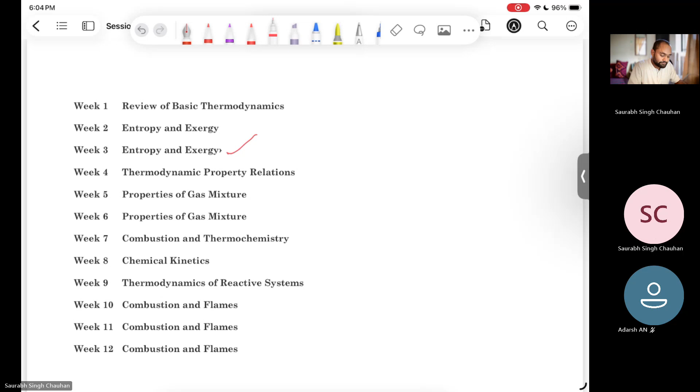If you have no doubt, then probably we can start with the questions. So there is a note saying that we have to use T naught and P naught to denote the dead state temperature and pressure respectively. When we'll be solving problems related to exergy, we know there is something called dead state. What is dead state? We will discuss that in the upcoming questions.

For the time being, let's start with question number 1. It is fill in the blank. It is saying that a quasi-equilibrium process, which is governed by PV to the power n is equal to some constant, is called what we call such type of processes. Very easy. We call them polytropic processes, right?

So some initial questions will be easy revision type of questions. So this type of process, we call it polytropic process. I don't think there can be any doubt in this question. If it is there, you can ask, or we can move to question number 2.

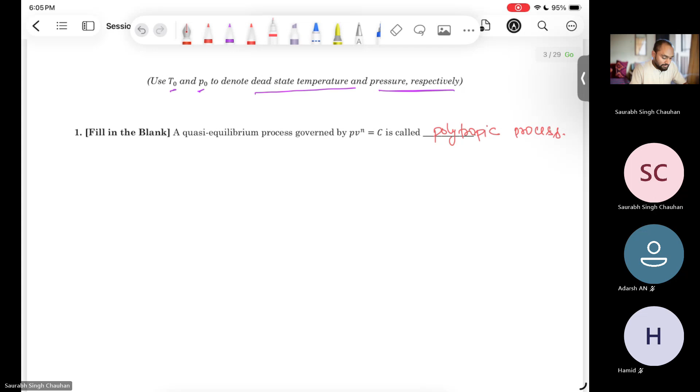Question number 2 is a multiple choice type of question. It is saying that for an ideal gas which is undergoing an isentropic process - ideal gas and isentropic, two keywords - which of the following relations correctly links temperature and pressure? So which of them is correct? T2 by T1 is equal to P2 by P1 whole power K minus 1 by K.

Okay, so part B, right? Yes. And if we are asked to derive that for an ideal gas and isentropic process, the relation is like that, then how should we proceed? We should start with TDS relation, because the TDS relation, for example, TDS is equal to du plus PdV.

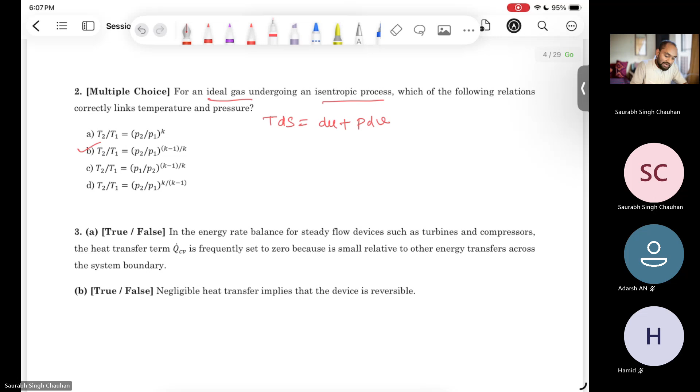We discussed in the previous session that this is valid for all processes, regardless of the process being reversible or irreversible, because all the variables involved are point functions, none of them are path functions. So it is valid for both reversible and irreversible process. Now it is saying that it is an ideal gas. So for ideal gas, we can write du is equal to Cv dt. This is for ideal gas.

And it is saying isentropic process, so that means ds is equal to 0 because it is isentropic process. So this TDS relation basically becomes 0 is equal to, because ds is equal to 0, Cv dt plus PdV. And from this relation, we can get this relation. We just need to do some algebraic manipulations.

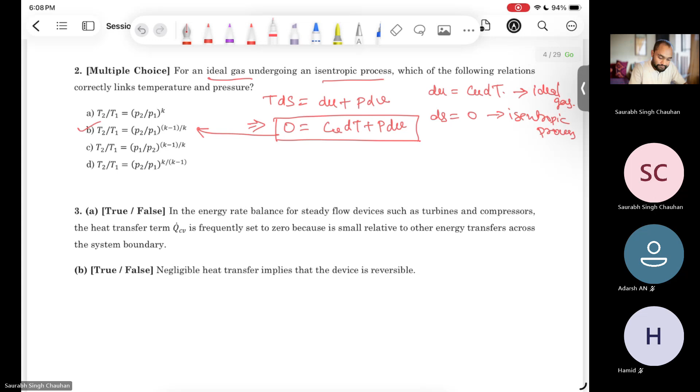Now, coming to the next question, question number 3. There are some statements and we have to tell whether they are true or false.

So first statement says that in the energy rate balance for steady flow devices such as turbine and compressors, the heat transfer term Q dot CV - this is basically time rate of heat transfer for the control volume - this is frequently set to 0 when we are working with turbines and compressors. So usually this term we neglect. It is saying that we do this because this term is small relative to other energy transfer across the system boundaries. We have to tell whether this is true or false.

Yeah, it is true, sir. It is true, right? Why? Because this term is relatively small. Turbine we usually assume that there are no heat losses, and same thing for compressor. And usually in many questions it is given that assume isentropic turbine, right? So when we say isentropic for these turbines or compressor, we basically mean that it is reversible and adiabatic.

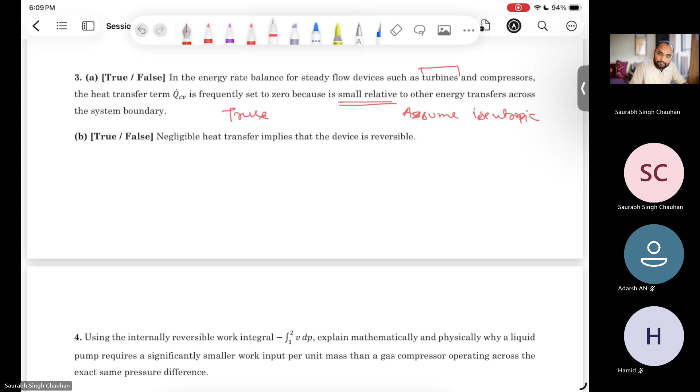But in the previous sessions, we will come to that point. So in many questions we encounter this term, right? Assume isentropic turbine or isentropic compressor. So we usually assume that this is reversible adiabatic.

Now there is another part. It is saying negligible heat transfer, so that means if dq, this thing is 0, which we are assuming in this type of devices, like it is given in the first part that we make this term 0. So if we are making this term 0, or let us say dq is 0, does that mean that the device is reversible?

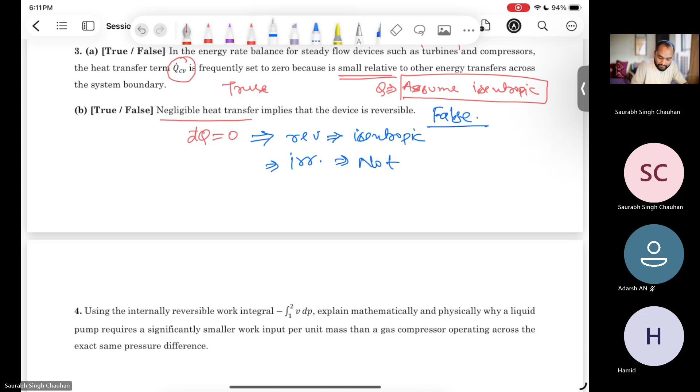Not exactly. It could be reversible or irreversible depending on whether it is isentropic or not. So the statement is false, right? Yes. So as you said, this implies reversible only if it is isentropic, or it will be irreversible if it is not isentropic. So this statement is actually false. Both things should be there, right? It should be isentropic and adiabatic, then only it will be reversible. If only dq equals 0, is this isentropic? It could be, information is not sufficient, could not be isentropic, depending on the case.

So in the ideal case, it should be adiabatic and isentropic. But in the actual case, in actual turbines and compressors, we know it is not isentropic. The exit entropy is higher than the entrance entropy, right? Yes, okay.

Just give me one second. I think there should be some spaces between the pages. Okay, we will insert some pages, no problem.

So question number 4, it is saying that using the internally reversible work integral. We know this formula, right? We have discussed this formula in the lecture. We have to explain mathematically and physically why a liquid pump requires significantly smaller work input per unit mass compared to a gas compressor when the pressure rise is the same, operating across the exact same pressure difference. So if the pressure rise is same for both compressor and pump, then the pump requires less work input. Why so?

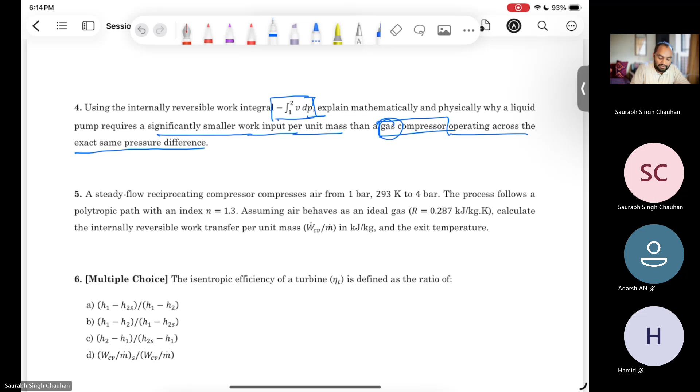Even if you don't invoke the compressibility factor, this V is high, right? Because the formula is simply V dP, and dP is the same. So the only variable left is this V term. So this V is high for gas. Okay, yeah, sure.

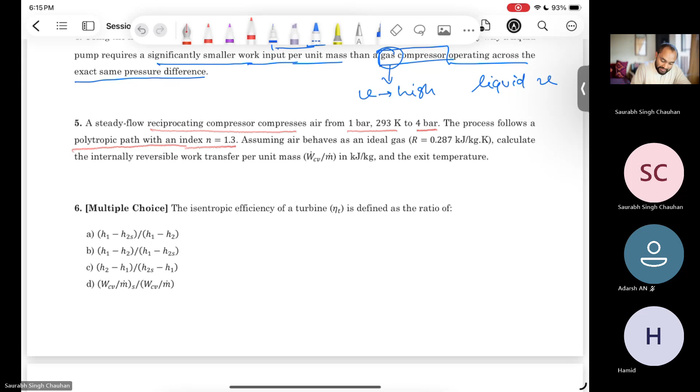Question number 5: it says a steady flow reciprocating compressor compresses air from 1 bar, 293 Kelvin, to 4 bar. The process follows a polytropic path with index n equal to 1.3. Assuming air behaves as an ideal gas, and the gas constant is given, it is asking us to calculate the internally reversible work transfer per unit mass in kilojoules per kg, and also the exit temperature.

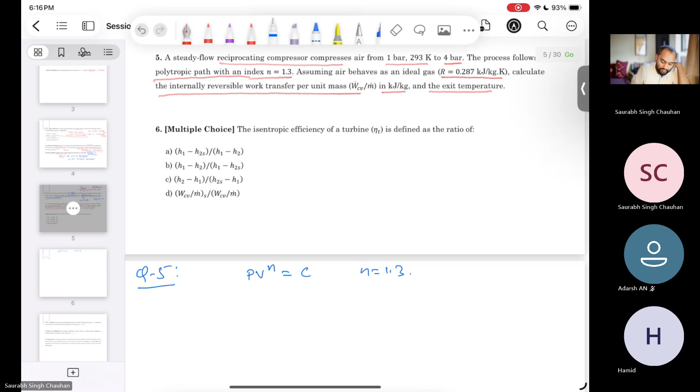It is a polytropic process, so for a polytropic process we can write PV to the power n equals some constant, where n equals 1.3. And for polytropic processes, we know the work input. Per unit mass, this is minus nR divided by n minus 1, times T2 minus T1. Correct? Yes sir, for polytropic process.

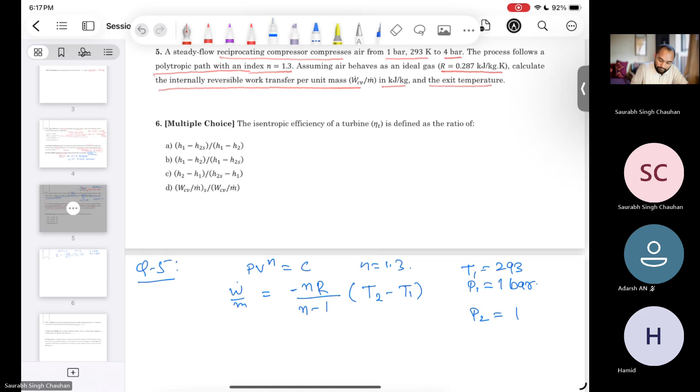So T1 is given, right? T1 is 293, and P1 is 1 bar. P2 is 4 bar, and we don't have T2, right? So T2 we can calculate from this polytropic relation. T2 by T1 equals P2 by P1 to this formula, right? So from here we can calculate T2.

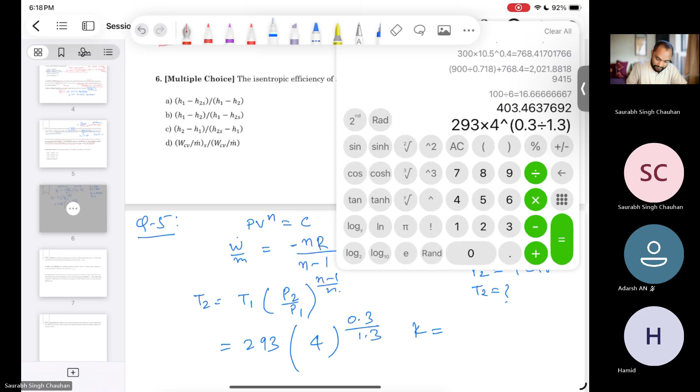So T2 will be T1 times P2 by P1 raised to power n minus 1 by n. T1 is 293, and 4 raised to power 0.3 by 1.3. So 293 times 4 raised to power 0.3 by 1.3 gives 403.46 Kelvin. So we have got T2.

Okay, and what else do we need? We got everything, right? T2 minus T1, we just need to substitute in the formula. So I think you can substitute and get it. So the work done we can calculate from this, and T2 is the exit temperature. 136.8, I don't have the exact values, I have to calculate, but anyways this is a simple question, you just need to substitute it.

Okay, so question number 6, it is saying the isentropic efficiency of a turbine is defined as the ratio of...

So we have some options, H1 minus H2. 1 is basically inlet and 2 is outlet, the actual one. And 2S - if you see any S, that means it is reversible, isentropic. Outlet for the reversible one.

Reversible outlet, yes, isentropic. Okay, so question number 6. There are some options, so which one of them should be correct? H1 minus H2 by H1 minus H2S - that's Option B, right? Yes.

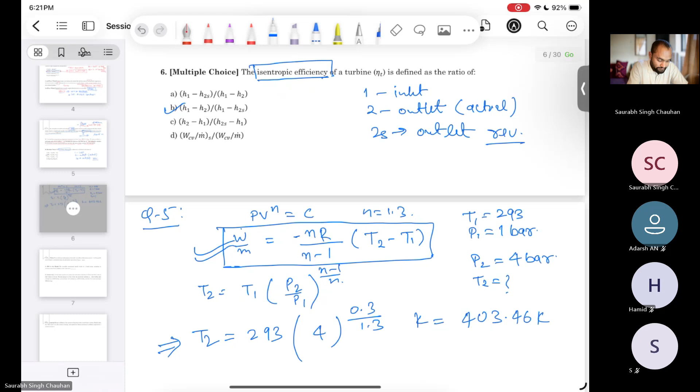Okay, so coming to the next question. And you can try to prove it yourself, okay - that isentropic efficiency and the second law efficiency are the same, okay?

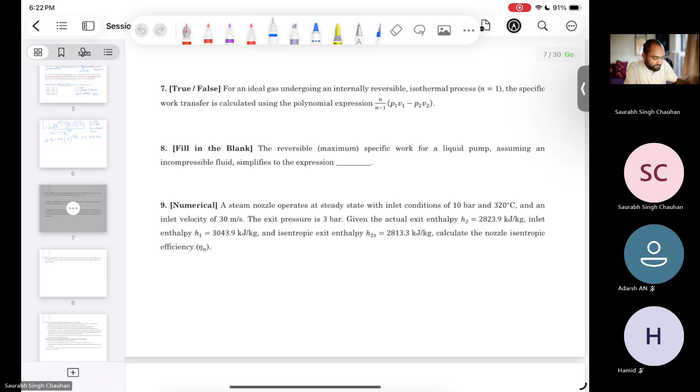Question number 7: it is saying that for an ideal gas which is undergoing an internally reversible isothermal process - so for isothermal process we know n is equal to 1 for the polytropic equation - the specific work is calculated using this polynomial expression. We have to tell whether it is true or false.

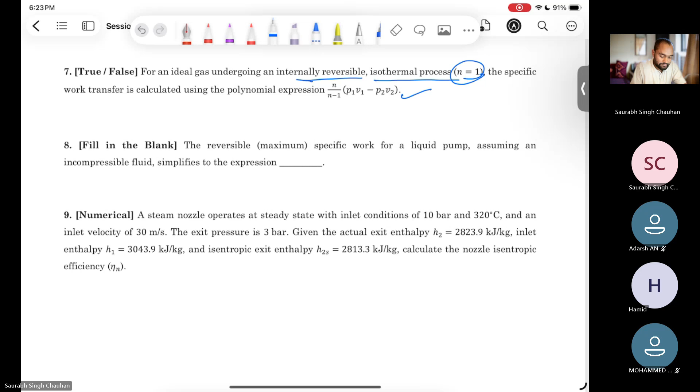Is it true or false? Obviously not true, right? n is equal to 1, and in the denominator you are getting n minus 1 equal to... it will be log of P2 by P1. Whatever the formula is, it's very obvious that if you have n minus 1 in the denominator, then this should not be valid for n equal to 1 type of processes, right? So this is false.

Now next question: the reversible maximum specific work for a liquid pump, assuming incompressible fluid, simplifies to the expression. So we had the expression for work done previously, right, when we were discussing compressors and pumps - what we had was the integral of V dP.

For incompressible fluid, this specific volume is essentially constant, okay? So this will be specific volume times integral of dP from 1 to 2, which will simply become V times P2 minus P1. So this is the expression.

Okay, now question number 9. It is saying that a steam nozzle operates at steady state with inlet condition of 10 bar and 320 degrees Celsius, and an inlet velocity of 30 meter per second. The exit pressure is 3 bar. Given the actual exit enthalpy H2, the inlet enthalpy, and the isentropic exit enthalpy are given, we have to calculate the nozzle isentropic efficiency.

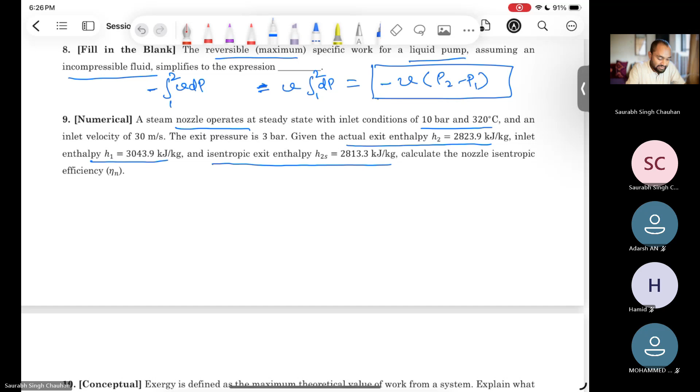I don't think that you need a property table or any paper or notes for the exam, because in most of the questions where we need these values, they will be provided. I'm not sure, but they should be providing it, because practically it is very difficult to check what steam table every student is carrying - they are not carrying any notes or something like that, right? So in most of the questions it is already provided, but I'm not sure for this particular case.

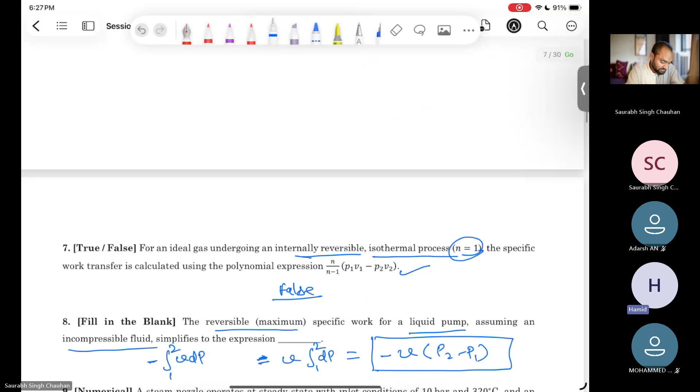Correct. Whenever we see this term efficiency, by efficiency we mean what actually we are getting divided by what actually we could have got. So what actually we are getting in case of nozzle, that will be increase in kinetic energy. The purpose of any nozzle is to increase the kinetic energy. So we will calculate what is the actual amount of increase in kinetic energy first, and we will divide that by what could have been the amount of kinetic energy increase if the process was isentropic, and we will just take the ratio.

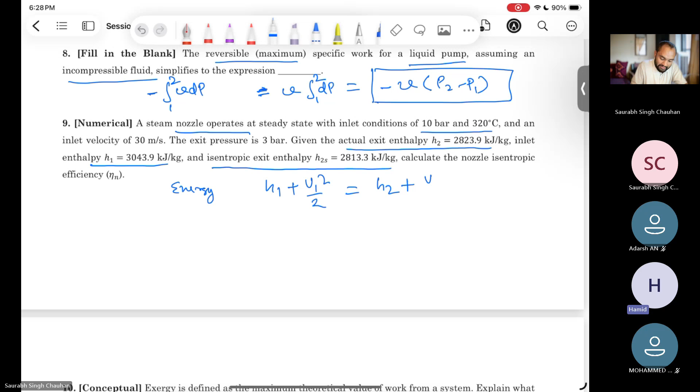So it is simply an energy balance. If we write the energy balance equation, this is enthalpy at inlet plus kinetic energy at inlet. This should be equal to enthalpy at outlet plus kinetic energy at the outlet. So you can calculate increase in kinetic energy, the actual one.

So what we have is inlet velocity, and we don't have the outlet velocity, right? So anyways, we can calculate the increase in this kinetic energy from this equation. Actual change in kinetic energy will be this, 220, whatever it is.

So this should be H1 minus H2, right? And isentropic increase would have been H1 minus H2S, okay? And we will just divide these two things. Is it correct? I think this would be the procedure, right?

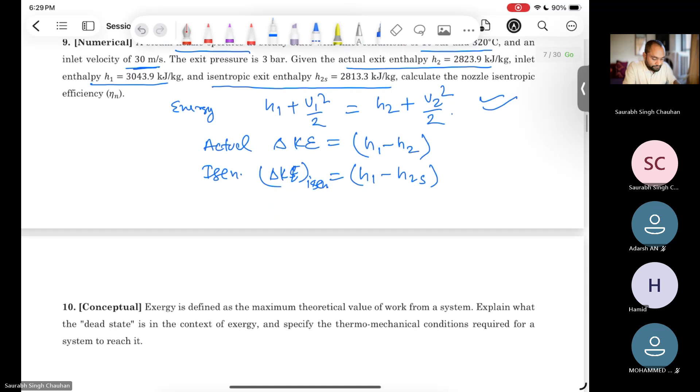So, but can we calculate inlet velocity also, right? Inlet velocity. No, inlet velocity we have, this inlet velocity, yeah. But I don't think we need the inlet velocity because we have the enthalpies.

We want to calculate the outlet kinetic energy. Yes, in this case we need to calculate outlet kinetic energy. Is it like difference between the inlet and outlet, or the outlet kinetic energy? No, outlet kinetic energy. So we need to calculate the outlet kinetic energy. So the efficiency for nozzle, it should be outlet kinetic energy, that is V2 square by 2 actual one divided by V2 square by 2 in the isentropic case.

So for this delta KE, we can just remove U1 square by 2 on both sides, numerator and denominator. So we have all the enthalpies at inlet, outlet, both for both cases, isentropic and non-isentropic, and we have inlet velocity, so you can calculate.

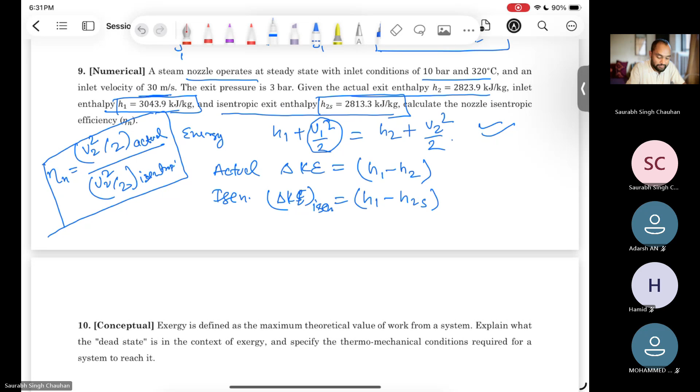We will not need this temperature and pressure values. If we didn't have these enthalpy values, and we had the steam tables, then we would have required these pressure and temperature values to check the enthalpy values from the steam table. So we are asking whether we need to carry them. If these enthalpy values were not given in the question, then we would have required the steam tables, but here it is given in the question. So questions should be of this type. This is my guess, but you should read the instructions before the exam.

Okay, so question number 10 says that exergy is defined as the maximum theoretical work from a system. And we have to explain what is dead state in the context of exergy, and specify the thermomechanical conditions required for a system to reach it.

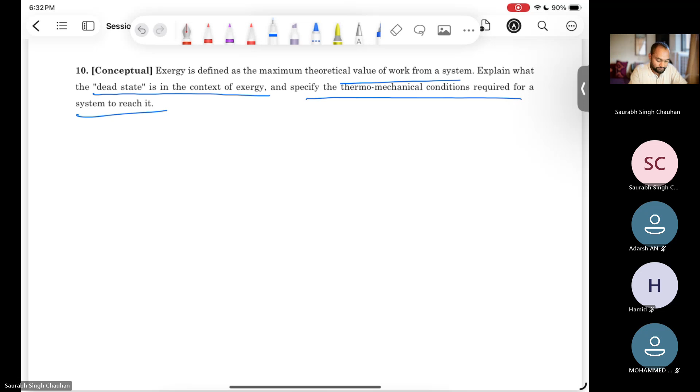So when we talk about exergy, we talk about dead state. So what is that dead state? For dead state, I have taken this content from the book by Cengel and Boles. So we will just read it, and I think everything should be clear. It is just theory.

So in exergy analysis, the initial state is specified. Right, the state of the system will be given - this is the temperature, this is the pressure, whatever variables we require to define a state of the system, those will be given, so that is not a variable. Why is it given? Because what will be asked is to calculate the exergy of this particular system. So whenever we say this particular system, then we should have a defined state.

Okay, so state will be already defined, so that is not a variable. Now if the state is changed, we are going from state 1 to another state, then we can have some work interactions. The work output will be maximum when the process between the two specified states is executed in a reversible manner, right? This we have already discussed. If we want to calculate the work output, then work output is maximum if the process is reversible.

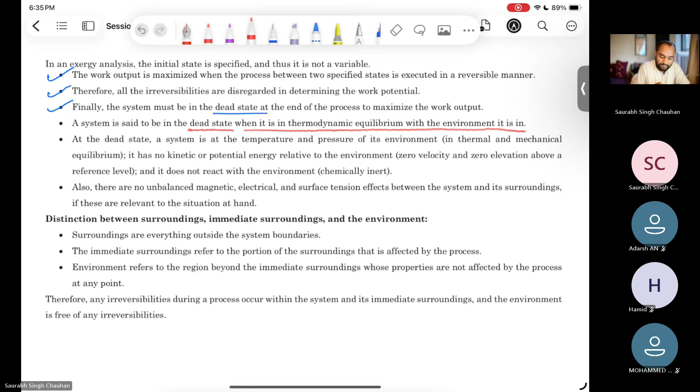Now the definition of dead state is coming. The system is said to be in dead state when it is in thermodynamic equilibrium with the environment it is put in. It should be in thermodynamic equilibrium with the environment in which it is kept. This is the meaning of dead state. At the dead state, a system is at the temperature and pressure of its environment. Temperature is same with the environment, that means it is in thermal equilibrium. Pressure is same, that means it is in mechanical equilibrium.

And it has no kinetic or potential energy relative to the environment. So in the reference frame of environment, the system should be stationary, zero velocity and zero elevation from the reference point. Zero elevation means there is no potential energy, and zero velocity means there is no kinetic energy. It does not react with the environment, so that means it is in chemical equilibrium as well. When all these equilibriums are there, we say it is in thermodynamic equilibrium with the environment. So this thermodynamic equilibrium itself is sufficient.

Also, there are no unbalanced magnetic forces, electrical forces, or surface tension effects between system and surrounding. So basically it is equilibrium from all the aspects, electromagnetism and thermodynamic aspects. So there is no potential difference, any type of potential difference, neither gravitational potential difference, nor electrodynamic potential.

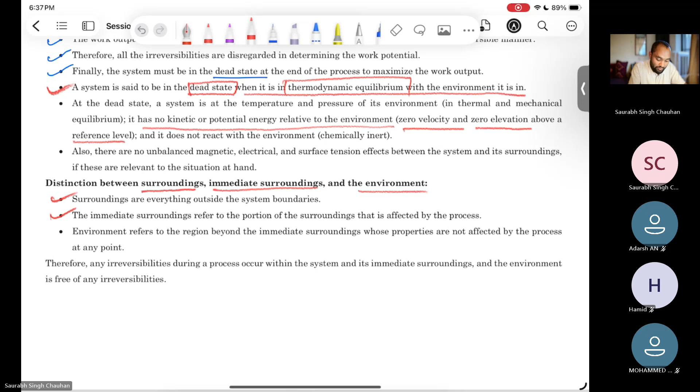The immediate surrounding refers to the portion of the surrounding which is affected by the process or the system. And the environment is that portion beyond the immediate surrounding whose properties are not affected by the process at any point. Environment is basically the region beyond the immediate surrounding. So we have this system.

And outside the system we have its immediate surrounding. For example, if you consider this is a hot cake, then just around this system, this is its immediate surrounding, affected by the system. But if you go a little far from this, if you have a big room and you have kept your hot cake in one corner, then most probably another corner will not be affected. So this outer region is our environment.

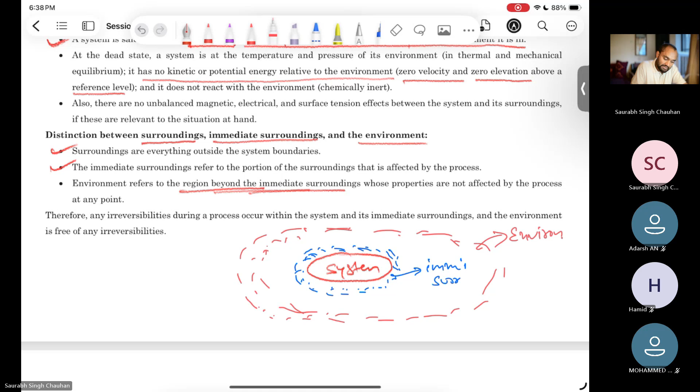And the whole thing, which is even beyond, starting just from the system boundary and including everything just beyond this system boundary, it is universe, our surrounding. So the surrounding plus system makes the universe.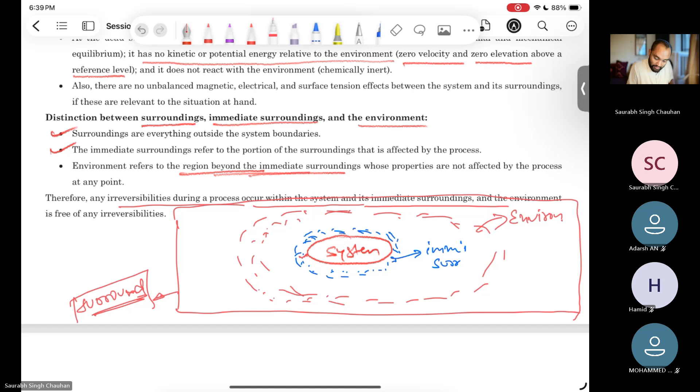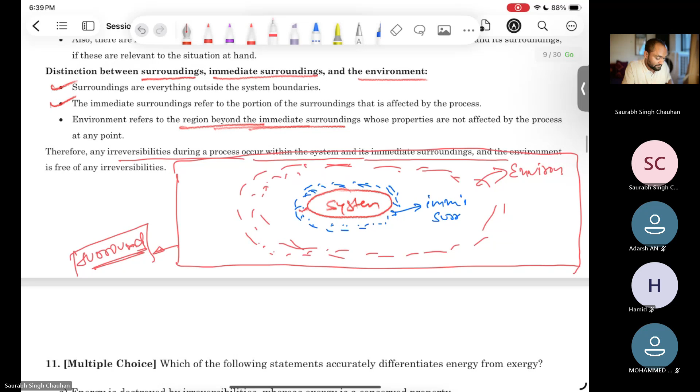Anyways, so any irreversibility during a process occurs within the system and its immediate surrounding. Environment is free from any irreversibility. So wherever the process is occurring, irreversibility can be within the system, it can be just outside the system which is immediate surrounding, but environment, which is a little beyond these immediate surroundings, that is free of any irreversibility. When the system is in thermodynamic equilibrium with the environment, then we say that the system is in the dead state. So this is the meaning of dead state.

So this is what was asked in the previous question.

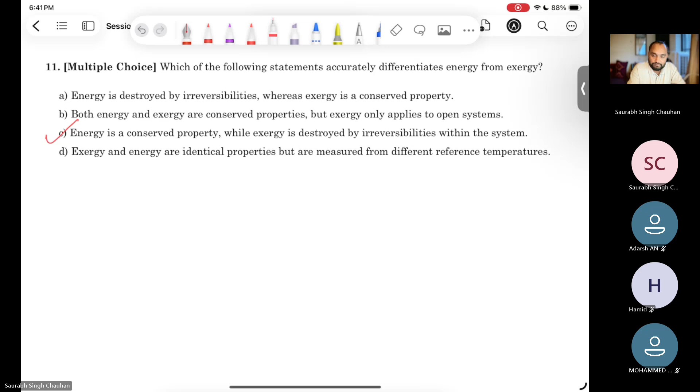Now coming to the next question, question number 12 says the decrease in exergy principle states that for an isolated system, the only processes that can occur are those for which exergy of the overall system decreases. Is it true or false?

True. In the previous session we discussed that for an isolated system, only those processes are possible for which entropy of the overall system increases. This is just another version in terms of exergy, both are different languages saying the same thing. Exergy of an isolated system will decrease and entropy will increase. So this is true, yes.

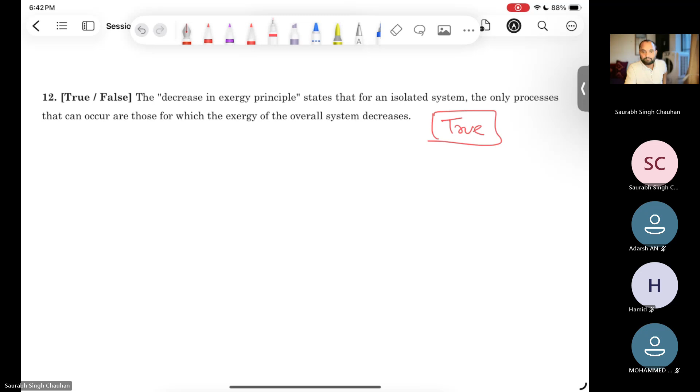Okay, if there are irreversibilities, then exergy will be reduced. Now coming to the next question.

Question number 13: the specific exergy E of a closed system accounts for internal energy, boundary work, entropy, kinetic and potential energy changes relative to the environment. The expression involves E, where E here is for exergy, okay? Just be careful about the notation, because many times we use E for energy, specific energy or any form of energy, but here it is used for specific exergy.

So specific exergy is U minus U naught. U is the internal energy per unit mass of the system, and U naught is the internal energy per unit mass of the system when the system is in the dead state. At the very beginning of the session we said this naught, T naught, P naught, all these naught basically mean dead state. So U naught means internal energy per unit mass at the dead state. The expression is E equals U minus U naught, plus P naught times V minus V naught, minus T naught times S minus S naught.

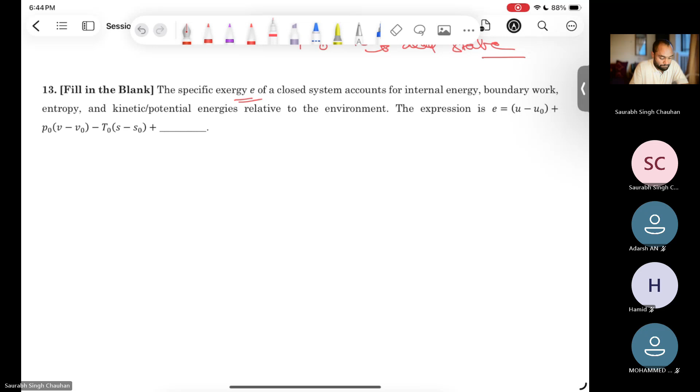Plus one more term. So what is that term? One part is internal energy, another is related to boundary work, so this is for internal energy, this is for boundary work, and this is for entropy.

And there will be one more term for kinetic and potential energies. So this will be kinetic plus potential energy, V squared by 2 plus G times Z, where Z means the height from the reference level. So this is the term which should go there.

Now question number 14, on the closed system exergy balance equation. Here subscripts 2 and 1 mean states, final state and initial state, and there are a few more subscripts. For the closed system exergy balance equation, E2 minus E1 equals EQ minus EW minus ED. Define the term ED.

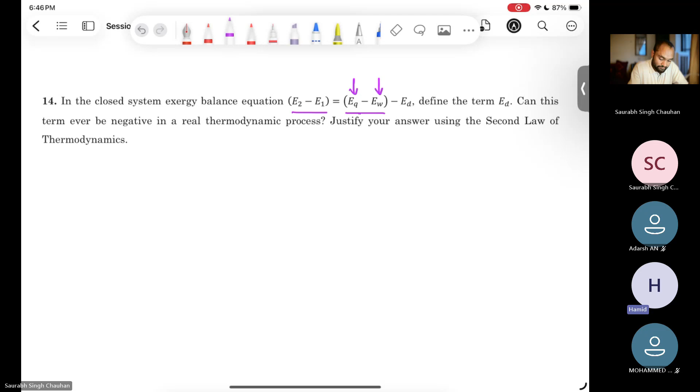We have to tell what the term ED is. EQ basically means exergy associated with heat, EW means exergy associated with work, minus ED. So what is this other term ED? Is it the disintegrated exergy due to irreversibility? Exactly correct. So ED here is exergy destroyed due to irreversibilities.

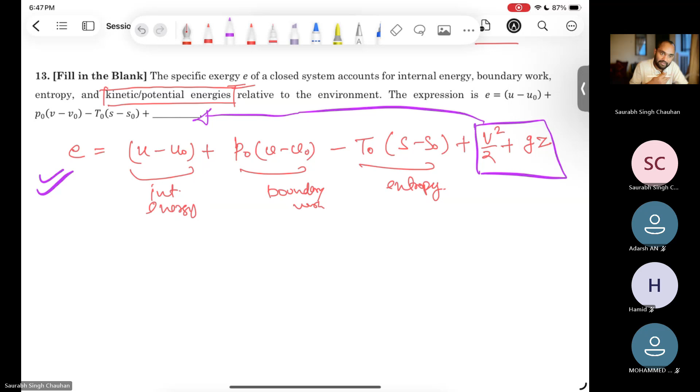So if we are asked to calculate the exergy destroyed in any process, we can easily calculate it from this balance equation. We can calculate the exergy at the final state and at the initial state from this particular equation. Then we take the difference, and that will be the change in exergy.

We can calculate the exergy associated with heat, which we might have studied already. And exergy associated with work is basically work itself minus ED, where ED is exergy destroyed. So from this balance equation, we can calculate how much exergy is destroyed.

How much exergy is destroyed is basically a measure of the irreversibilities. More the exergy destroyed, more the irreversibilities. This is very important: irreversibilities are measured not by change in exergy, because a system can go from state A to state B with exergy being reduced, but that reduction does not mean the process is irreversible.

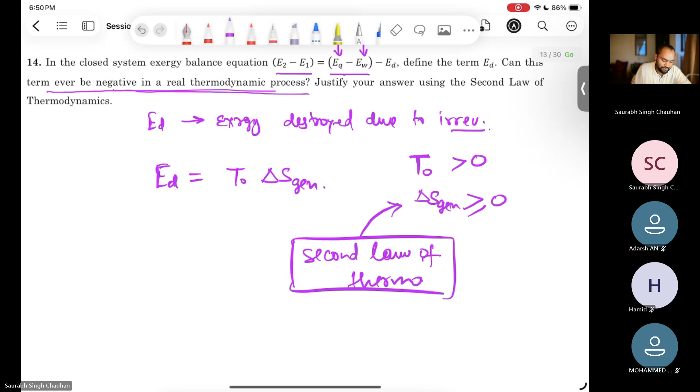This is actually the second law of thermodynamics, another statement of it. So we had to justify our answer using the second law of thermodynamics, which we have already done.

Coming to the next question: an internal combustion engine cylinder contains gaseous combustion products at 7 bar, just before the exhaust valve opens. The specific properties relative to the dead state are given, T naught and P naught are given, and are calculated. U minus U naught is given, S minus S naught is given, and the flow work term P naught times V minus V naught is calculated. We have to calculate the specific exergy of gas in kilojoule per kg.

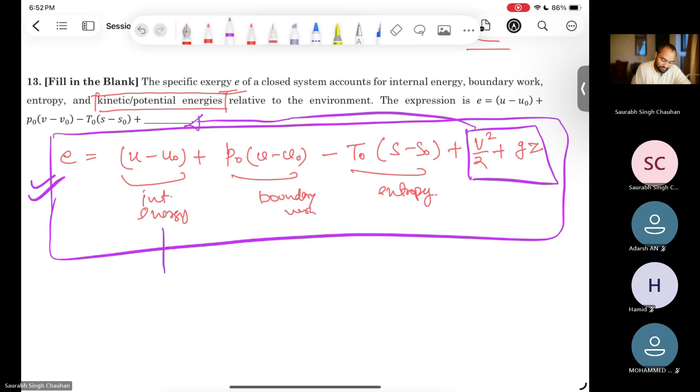This is not really a question, it's something we've already discussed. Exergy consists of an internal energy term, a boundary work term, an entropy term, and kinetic and potential energy terms. Since we neglect kinetic and potential energy, and these things have already been calculated, there is nothing left for us to calculate.

So questions are very easy in today's session, but the concepts are important. We have to neglect kinetic and potential energy changes. This value is already given, that is already given, T naught is already given, and we can calculate E, so no problem. We just need to add all these values.

For a steady state control volume, the specific flow exergy differs from the specific exergy of a closed system E, because it replaces internal energy U with which property to account for the flow work?

Hello? Yes, sir, yes sir, it's enthalpy. Enthalpy, right?

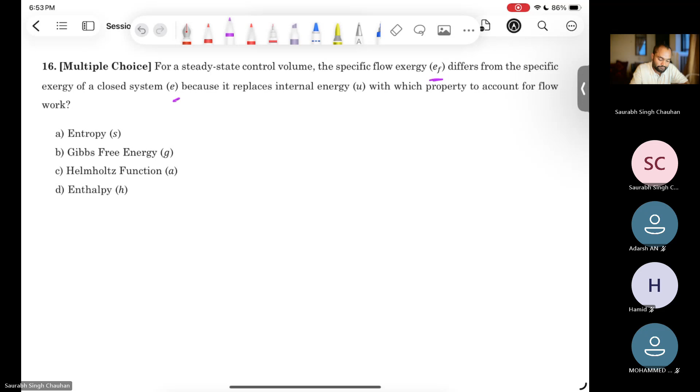In open systems, we have Q minus W is equal to U for closed systems. For open systems, we have Q minus W is equal to H, right? This is for energy balance, and similarly for exergy also, this U is replaced by H for open systems—enthalpy. Why? Because open systems involve flow work.

What is flow work? Actually, how much is the flow work? Flow work is mass times PV, a work interaction also. Per unit mass, if you write it, it will be simply PV, specific volume. Because mass which is crossing the boundaries carries some flow work, and that flow work is basically P times the specific volume. So enthalpy has internal energy plus this flow work—both are bundled within the enthalpy.

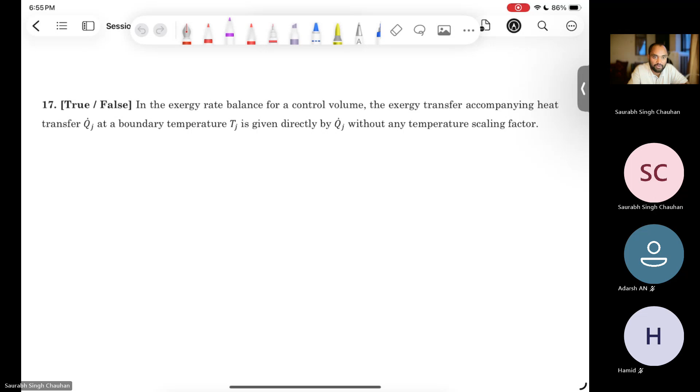Coming to question 17: it is saying that in the exergy rate balance for a control volume, the exergy transfer accompanying heat transfer Qj at boundary temperature Tj is given directly by Qj, without any temperature scaling factor. Is it correct? Now it is important, because somewhere I said something different.

Yes, here we said that exergy change in any process, or actually exergy destroyed, can be calculated using this equation, because we can calculate the exergy at the initial state and the final state. We can calculate the exergy associated with the heat and the exergy associated with the work. Exergy associated with the work is the work itself, but exergy associated with heat—that we should calculate, and how that is calculated is what this question is asking.

It is saying that exergy transfer accompanying heat Qj at boundary temperature Tj is simply Qj. Is it correct? Because exergy associated with work is the work itself, but is exergy associated with Q equal to Q itself? It is saying it is given directly by Qj. Is it correct? No, not correct. Why not correct? Because a factor of 1 minus T0 by Tj needs to be considered.

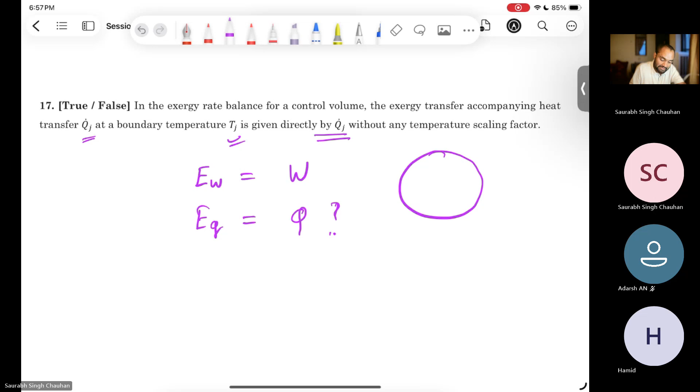Because if there is some heat Qj at temperature Tj, and the environment temperature is T naught, then we can run a heat engine between this particular temperature Tj and T naught, and we can get some more work. So how much work can we get? That work will be equal to this Q times 1 minus Tj by T naught.

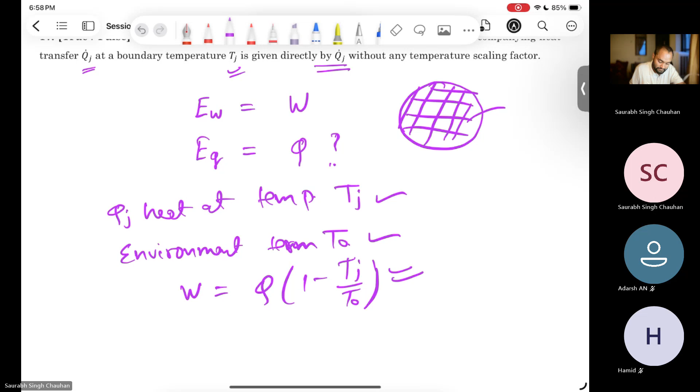One important thing you should also remember is that if this is a body—some finite body, let us say a hot iron ball with some temperature—then this Tj will be reducing gradually. So we cannot use this directly; instead, we will have to use integration, and then some logarithmic function will come into the picture. But anyway, the important thing is that we need to calculate the work associated, and the work itself is directly the exergy.

Is it T0 by Tj, or... sorry, Tj, right? Sorry, can you please repeat? I think it is T0 by Tj, no sir? You wrote Tj by T0. Yes, sorry, oh thank you. Correct. Okay.

So the scaling factor is there. So what is that scaling factor? That scaling factor is actually the Carnot factor, we can say. It is 1 minus T naught by Tj. So this statement is actually false.

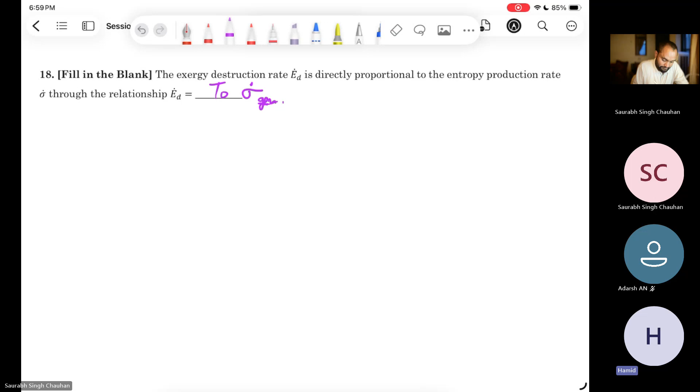Now coming to the next question, question number 18: it is saying that exergy destruction rate ED is directly proportional to the entropy production rate through the relation—we have already discussed this, right? This is dead state temperature, or the environment temperature, times the entropy generation rate. So exergy destruction rate is given by T naught times sigma dot, entropy generation.

Now the next question: a steady state counterflow heat exchanger operates adiabatically with respect to the surrounding and involves no work transfer. So this heat exchanger is adiabatic with respect to the surrounding. Because if we are saying heat exchanger, there should be heat exchange, and if it is adiabatic, how will heat exchange take place? So it is actually adiabatic with respect to the surrounding—whatever fluids are there, they are exchanging heat between themselves, but heat is not being lost to the environment. So we have to write the simplified exergy rate balance equation for this device, and show that the rate of exergy destruction is related to the change in flow exergy of the hot and cold streams. So how will we proceed?

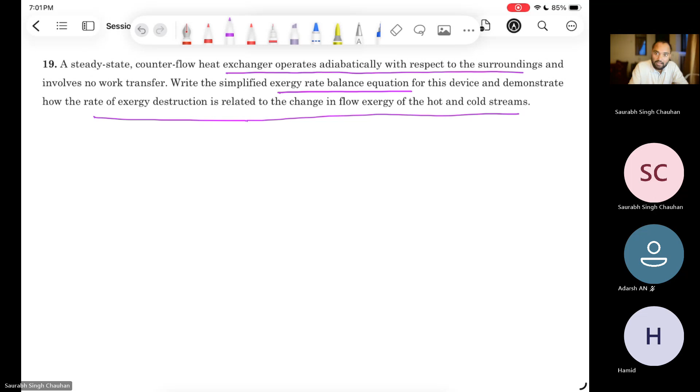Exergy rate balance equation we have to write. And steady state exergy balance should be equal to 0. We have already written this exergy balance equation somewhere, right? This is what we had written. So simply this thing only.

Exergy associated with heat, how much will it be? We just wrote 1 minus T naught by Tj, and heat transfer Qj. This heat transfer is with respect to environment. Minus exergy associated with work, that will be W. Plus if there is some mass coming in, then mass times exergy associated with the mass coming through inlet, minus exergy going outside with the mass. So mass coming through inlet Mi, and mass going through outlet Me, and associated entropy will be exit.

This should be equal to what? Exergy destruction, right? So minus ED is equal to 0. Now it is saying that it is adiabatic with respect to environment, so this heat loss term will be 0. It involves no work transfer, so this W dot will be 0. So what we have, we are left with only this term.

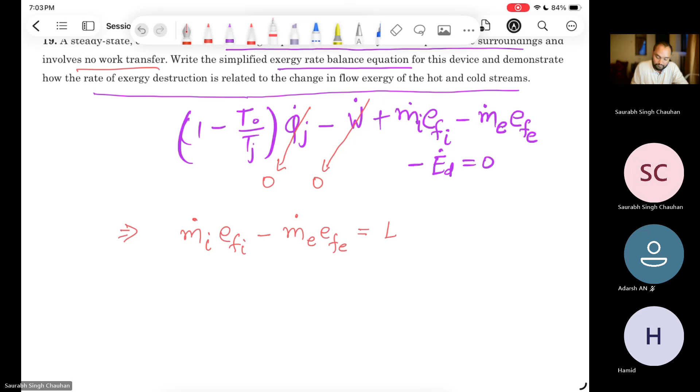Now coming to the next question. A superheated water vapor undergoes uncontrolled expansion through a throttle valve from 30 bar at 320 degrees Celsius to 5 bar. The inlet entropy is given as 6.62 kilojoule per kg Kelvin, and the exit entropy is also given. Assuming an ambient temperature of T0 equal to 293 Kelvin, and that the process is adiabatic. So expansion means it is going through a throttle valve, and it is adiabatic. Determine the exergy destruction per unit mass in these units.

So it is adiabatic but not isentropic, right? This means it is irreversible. If it was adiabatic and isentropic, then it would have been reversible. It is not isentropic because there is entropy change from S1, it has changed to S2. So it is irreversible, so there will be some entropy generation. And if entropy generation is there, then there will be exergy destruction.

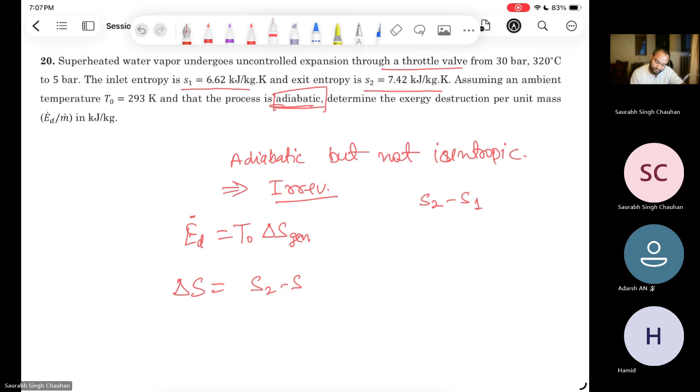But here it is given, what is given? Adiabatic. Adiabatic is given, so there is no entropy generation due to heat transfer. So entropy change, that is S2 minus S1, that is entropy associated with heat, del Q by T, plus entropy generation delta. So if the temperature changes are small, then we need to replace this by D, and so on.

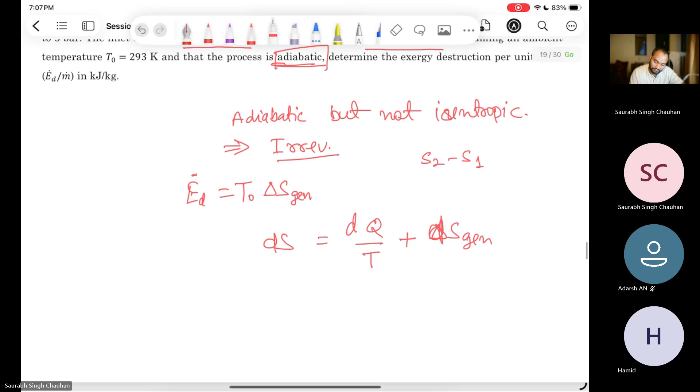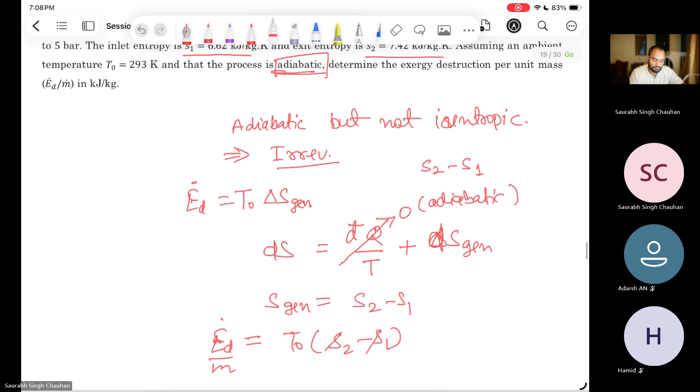So I will write dS is equal to... but this dQ is 0 because it is adiabatic. So entire entropy change is generated entropy. So entropy generated, S gen, this will be S2 minus S1. And S2 is given, S1 is given, so you can calculate S2 minus S1, and you can calculate this thing, right? This will be T naught times S2 minus S1, per unit mass.

If this was not adiabatic, then what should we have done? We should have calculated S2 minus S1 minus dQ by T, and whatever the process is, according to that we would have used this relation for temperature. And also we discussed that if you know the final state and the initial state, then we can calculate this entropy change, basically this term, this term.

You remember what I'm saying, or should I repeat it? No, sir, I got it. We got it. Okay.

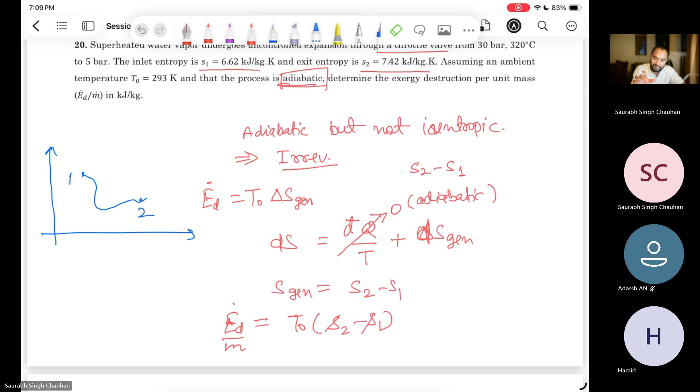Actually, if we have any two points, point 1 and point 2, and any path, and we don't know what this path is, then we simply decompose this path into two processes. One is isothermal, another is adiabatic. So along the adiabatic part, it will be 0, and along the isothermal part, we can calculate.

Sir, in this problem, or rather going back to that heat exchanger problem, here we are considering the total cold fluid as well as hot fluid as the system. Suppose I am considering cold fluid alone as the system, and the question is like that. Then heat exchange is to be taken into account, even though it is saying it is insulated.

If you are considering cold fluid only, then it is exergy change of cold fluid only. And if you are considering hot fluid only, then it will be exergy of hot fluid only. The exergy change of hot fluid will not be same as exergy change of cold fluid.

When we do only for energy, only heat, whatever heat is lost from the hot fluid is exactly equal to the heat that is received by the cold fluid. But the exergy which is lost from the hot fluid will not be exactly same as the exergy received by the cold fluid. So there will be some difference.

That difference will be your exergy destruction. But yes, you can consider only cold fluid, you can consider only hot fluid, but the difference will be the exergy destruction. So in that case, heat transfer is to be considered, right? In that case, yes, you will have to consider.

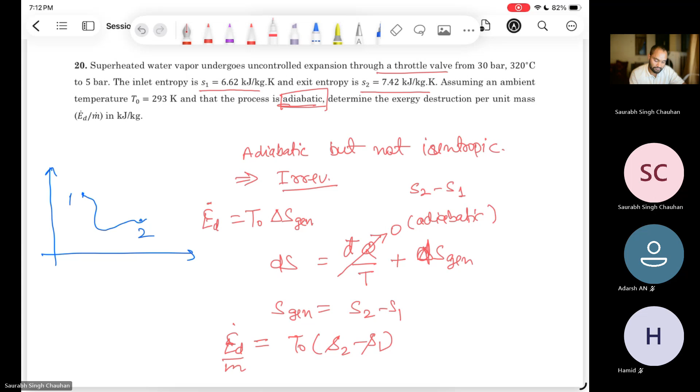For this question, I don't know what uncontrolled means here. Uncontrolled is not used for solving the problem, it is just given in the question. Even if it was controlled, this particular information is not used. We could have proceeded in exactly the same way, right? And you are right, it can be considered, then it is an isenthalpic process.

Now question number 21. It is saying that this second law efficiency or exergetic efficiency for a compressor is given by the ratio of - we have several options. Exergetic efficiency is given by which of these expressions? Option D. Okay, let us see all these options one by one.

Exergetic efficiency of a compressor. So for compressor, EF2 is the exergy at outlet and EF1 is the exergy at inlet, and W is the work provided to the compressor.

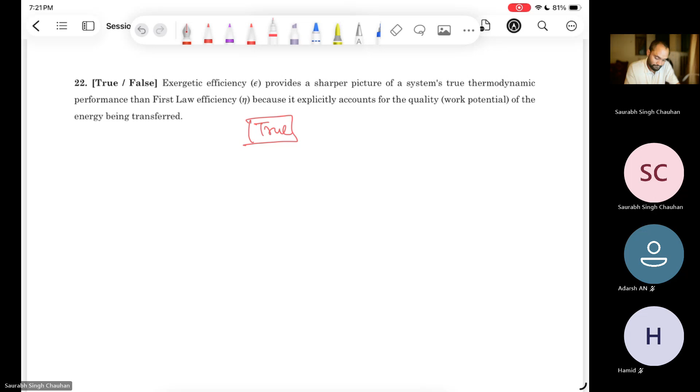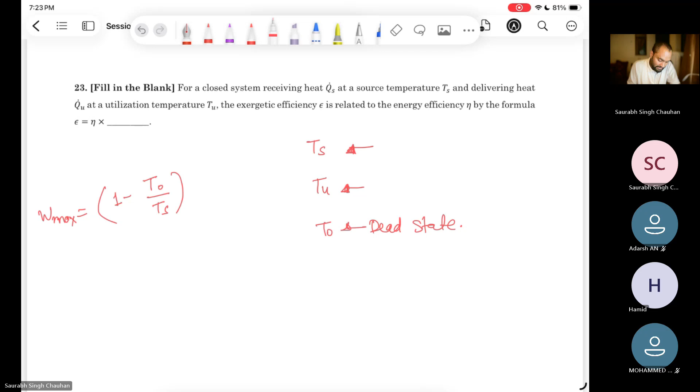So if it was rejecting directly to the dead state, then how much work could we have got? We could have got 1 minus T naught by TS, right? This is W max. But W actual that we are getting, how much we are getting? We are getting 1 minus T naught by, which we are getting this thing where we are rejecting TU by TS.

Okay, so the exergetic efficiency, this will be 1 minus T naught by TS divided by 1 minus TU by TS.

And energy efficiency, eta, that we have already discussed, that is 1 minus TU by TS. What is that efficiency? 1 minus TU by TS, right? Yes, yes, sir. Okay, so this is our eta.

It is saying that epsilon is equal to eta times what? So if there is something, let us say here it is x, so we have to calculate x, that x will be equal to this epsilon divided by eta.

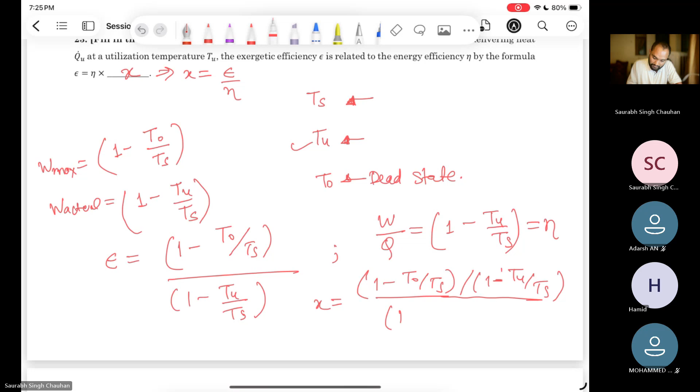Or we are missing something? There seems some inconsistencies there, sir. There is some inconsistency.

Is it 1 minus T0 by TU? I know whether work actual is the work potential at the rejection point. Is it 1 minus T0 by TU? Whether we have to take like that or? So you mean here it should be like this epsilon like that?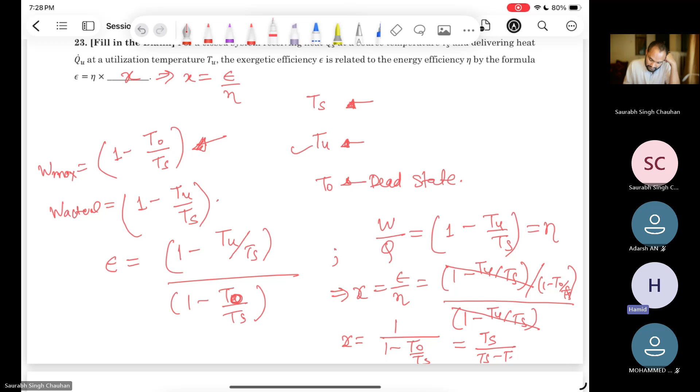So this TU by TS will cancel out, right? This term will cancel out and you will be left with x is equal to 1 divided by 1 minus T naught by TS. So this will actually be TS divided by TS minus T naught. Okay.

Not same. So again, we'll have to check this as well. Maybe we have the correct one and whatever is given in the answer sheet may be wrong, but maybe we are also missing something. Okay, so we will have to also check this question. This question was there in the lecture also, I think.

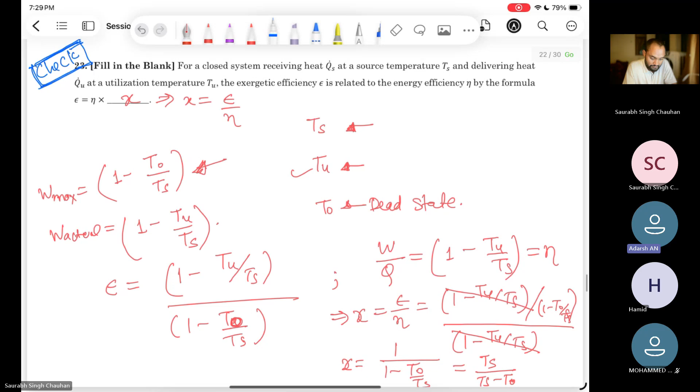In the previous lecture, there it was given that efficiency was defined as exergy output by exergy input. Okay, then maybe we are using a different definition, right? Yeah, then if you take exergy output, it will be 1 minus T0 by TU. And if you take the exergy input into Qu, divided by 1 minus T0 by Ts into Qs. And there Qu by Qs was defined as efficiency.

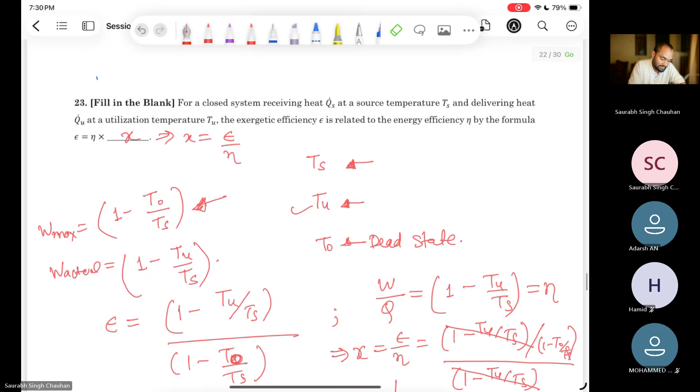Right? So that is how that answer may be coming, sir. So okay, there it was given that, in the last lecture, huh? Yeah, in the last lecture. In the video lecture, I also had some doubts in that, but it was derived like that. Okay, then I will check in the lecture. Then we will discuss in detail in the next session. Okay, sir, so we will check this in the lecture.

Okay, I will check. And which lecture? Last lecture you were saying, right? Yeah, in one of the last 3 lectures, whatever uploaded last week. Okay, so I will check and we will discuss in the next session this thing. Okay.

And what else we had to check? Okay, this only.

Maybe they might have used some other definition and we are using some other definition, right?

Now question number 24. The wall of an industrial drying oven has an inner surface temperature at 570 Kelvin and outer surface at 305 Kelvin. Environment is at 295 Kelvin. Heat transfers outward through the wall at constant steady state rate. Explain thermodynamically why the rate of exergy transfer evaluated at inner wall will be significantly higher than the rate of exergy transfer evaluated at outer wall, and what would happen to the difference?

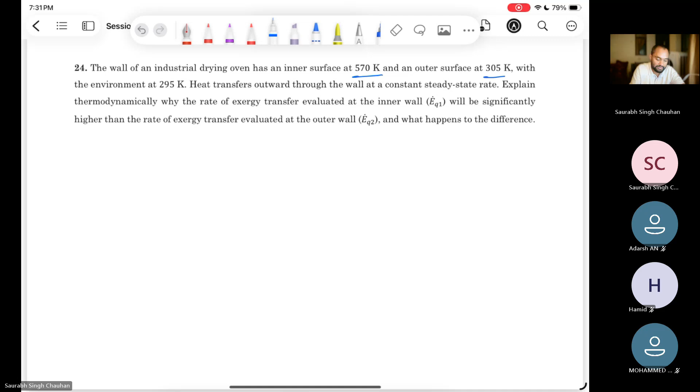So we can calculate the exergy at inner wall and exergy at outer wall, right? So at inner wall, exergy will be how much? Whatever heat is being transferred, let us say Q. So Q into 1 minus T naught, whatever T naught is, that is 295 divided by 570. At outer wall this will become 1 minus 295 by 305. So basically this is exergy at inner wall, and this is exergy at outer wall.

So if you calculate, then exergy at inner wall will be greater than exergy at outer wall, right? Right? Yes.

And what happens to this difference? This is exergy destroyed, right? Yes, sir.

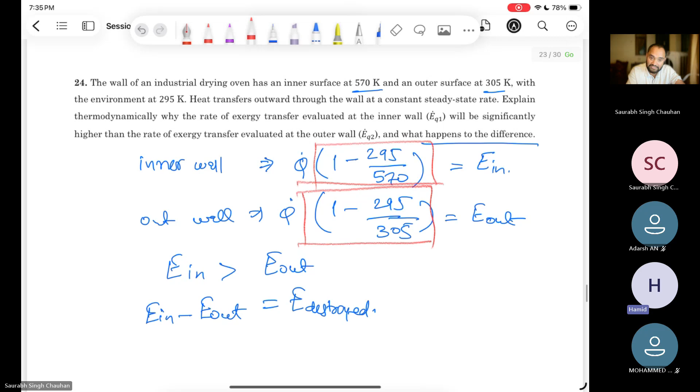So it is so because there is this Carnot factor. Carnot factor is different at inner wall and at the outer wall, right? And why is exergy being destroyed? Because of irreversibilities. And why the irreversibilities? Because heat transfer is taking place through the finite temperature difference, right? Finite temperature difference. So this means irreversibilities, and this means exergy destruction.

And we can calculate this difference, right? So we can move to the next question.

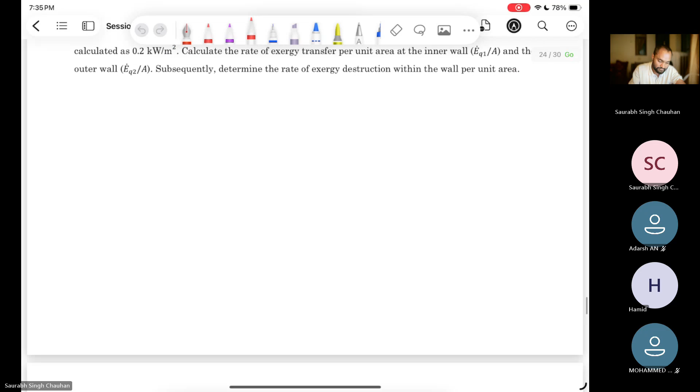Question number 26. It is saying, which of the following statements about exergy destruction is accurate? It is saying that exergy destruction is a thermodynamic property. Is it correct? No, it is not correct, because exergy destruction is associated with irreversibility, right?

Yes, sir. And irreversibility is associated with the path, not a path function. Sorry, irreversibility is associated with the path. It is not the point function.

Option B is saying exergy destruction is 0 for any adiabatic process. It is not right, right? Adiabatic process means there is no heat transfer, but irreversibilities can be there.

Option C is saying exergy destruction is always a positive quantity when internal irreversibilities are present. So this is right. If the internal irreversibilities are there, then exergy destruction will be positive.

Last option says that exergy destruction can be negative if the system cools down spontaneously. Exergy destruction is never negative, so again option D is not right.

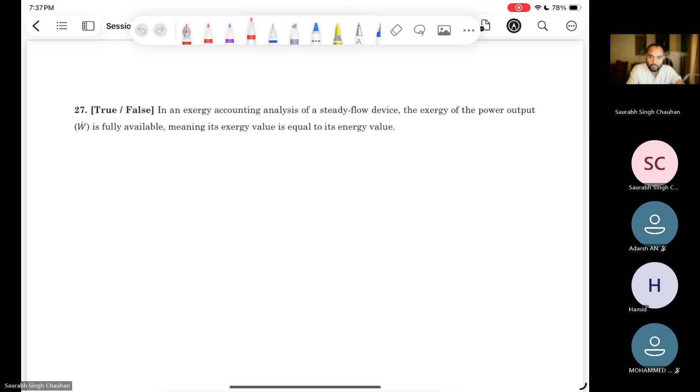Now move to the next question, 27, again true false. It is saying that in exergy accounting analysis of a steady flow device, the exergy of power output W is fully available, meaning its exergy value is equal to its energy value. So it is saying that exergy of power output, exergy associated with work.

Yes, this is true, right? Exergy associated with work is equal to the work itself. There is no factor like Carnot factor for the work, unlike for heat.

So is it like in exergy? Just a doubt. Because work is a high grade energy interaction, and since all the work can be converted from the portion of potential available for work transfer, since it is fully achievable, the entire exergy value for that part will be equal to the work done. Is it like this?

Yes, as we discussed, exergy associated with heat, exergy associated with work. So exergy associated with work is equal to work itself. Even if the whole work is not converted from one form to another, there can be exergy destruction, but exergy associated with work is work itself.

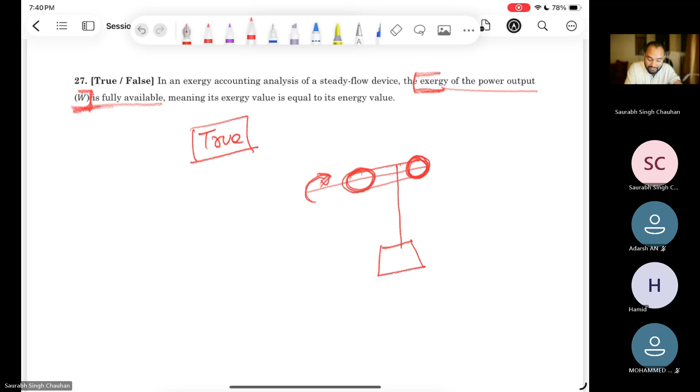If this shaft is rotating, this is shaft work. If the shaft is rotating and associated with it there is some weight being raised, then weight raising is again another form of work. So if a shaft is rotating and lifting the weight, then the shaft work is somehow being converted to the potential energy of this weight, and this potential energy of weight you can think of as work. So there can be some losses.

So the actual shaft work and the potential energy increase of this weight may not be the same, and the difference will be equal to the exergy destruction. But exergy associated with the shaft work is equal to the shaft work, and exergy associated with this raising weight is equal to the increase in potential energy.

Maybe another example we can take from an engine. In an engine we have some energy at the piston, and that piston is connected to the crankshaft. You are getting some work at the piston, that we call indicated power. So the power we are getting at the piston is indicated power, and the power we get at the shaft is our mechanical shaft power. So the exergy associated with this piston power is equal to the power of the piston itself, and the exergy we get at the shaft is equal to the power that we get at the shaft.

They may not be the same, there will be some difference, and that difference will be equal to the exergy loss. But when we say exergy of power output, exergy of power output is equal to whatever power is being produced at the piston. Maybe this is not fully relatable to this example because this is an open system, but you got the point what I mean, right?

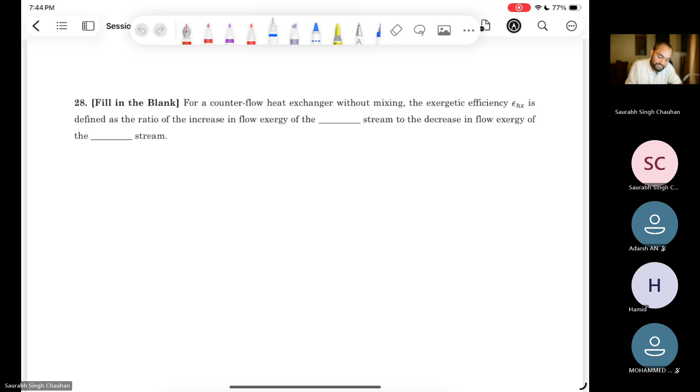Now question 28. It says for a counterflow heat exchanger without mixing, the exergetic efficiency is defined as the ratio of increase in flow exergy of some stream to the decrease in flow exergy of another stream. So there are two streams, cold stream and hot stream. As we discussed in the previous question, we could have considered only one stream, cold or hot, but there will be exergy reduction for the hot stream and increase in exergy of the cold stream. That increase in exergy of the cold stream will not be the same as the decrease in exergy of the hot stream, and that difference will be your exergy destruction. The ratio of increase in exergy of cold stream to decrease in exergy of hot stream, that will be the exergetic efficiency.

Okay, now we have a few more questions. Question number 29: compare energy accounting and exergy accounting for a system. So accounting basically means balancing, energy balancing and exergy balancing. If a heat engine rejects a large quantity of thermal energy at exactly the dead state temperature, explain why this represents a massive energy loss but zero exergy loss. Exactly at the dead state temperature.

Yeah, no energy, no work is done. No, that is why energy is lost. No, work may be done. Work is being done. Heat engine is doing some work, like we have some heat engine and it is rejecting heat at the temperature of dead state. So we can calculate the energy loss. What will be the energy loss? Energy loss will be exactly equal to the energy rejected, right?

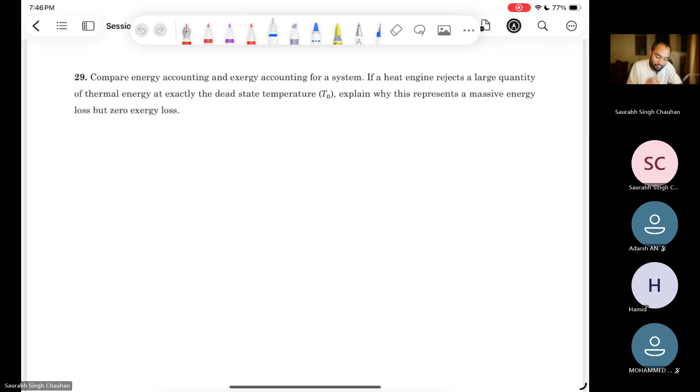Energy loss for the system will be equal to whatever energy is being rejected to this dead state, right? QL. Okay, because TL is T naught. But exergy loss, what will be the exergy loss? Dead state, exergy at source minus exergy at sink. What will be the exergy at source? This will be equal to QL times 1 minus T naught by TH, right?

Yes, and exergy at sink will be QL times 1 minus T naught by TL, and TL and T naught are same, so this will be 0. So what is exergy loss? It is 0. Exergy loss is 0.

Right? Yes, because this is exergy at source and this is exergy at sink. This is exergy at sink and this is equal to exergy loss actually, right? So exergy loss means whatever exergy is being lost at sink, and at sink we are not losing any exergy because it is already at dead state, right? Yes, sir.

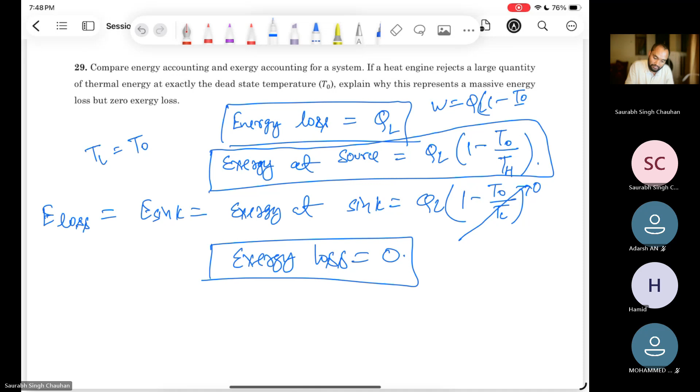Exergy at sink is almost... whatever exergy it had at source, all that amount of exergy has been converted into work, right? Yes, because work output will also be equal to Q times 1 minus T naught by TH.

Sir, but we are saying energy loss. Is it because we are not rejecting to absolute 0? One more part is there in the question. See, when we are saying loss, it basically means what we are rejecting to the sink, because once we have rejected to the sink, we are not utilizing that part, right? So energy that we have rejected to the sink, that is equal to energy lost, right?

Okay, and energy lost will not be this much. Here it will not be QL, I have written this wrong. This will be: energy loss will be QH minus W. And W will be equal to QH times 1 minus T naught by TH, this will be your W. So there will be some amount that we are losing, and that amount you can calculate, that will be QL, right? You will be rejecting some amount of energy to the sink. So QL is not equal to 0.

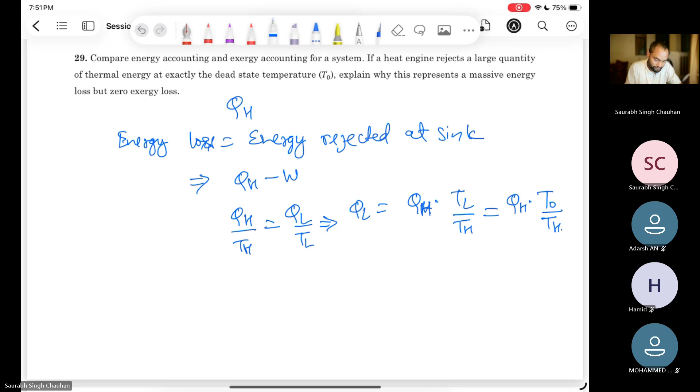But exergy at sink will be energy at sink, QL times 1 minus T naught by TL, and both of them are same, this will be 0. So exergy loss is equal to 0, but energy loss is equal to QH times T naught by TH. Now it is correct, right?

Yes, sir. Okay, so I was trying to say, like, if T0 was absolute 0, then energy loss will be 0. Then we will get 100% efficiency, right? Yes. 100% efficiency means no energy loss.

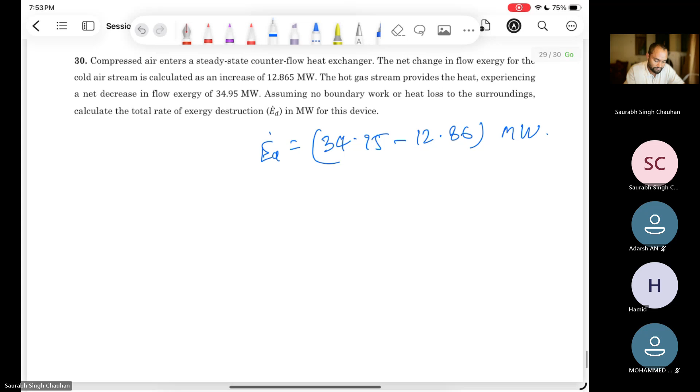Okay, so this was the last question, and I will check this question. There was some ratio-related question in the lecture, and we will discuss that in the next lecture.